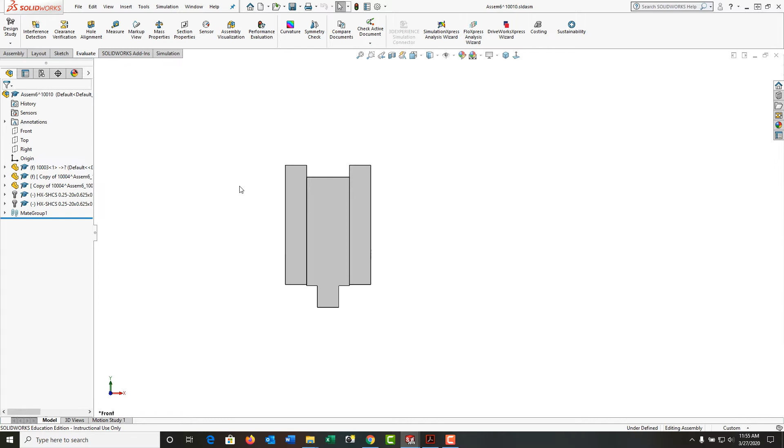The final subassembly I need to fix is my center jaw. Just like the other two, I'm going to select it and open it up. I'll look at it isometrically and I want to see how it behaves. Fortunately, it was the first part I brought in and everything is fine. I don't have anything to fix.

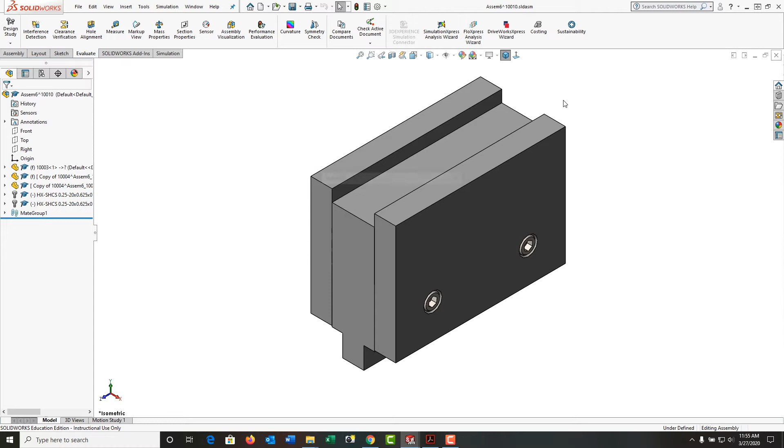If I did, I would go ahead and fix that, rebuild and save it. So I'll rebuild and save this as it's all fine, and then I'll close it. And just like my other two subassemblies, I want to give it a unique name. So I'm going to right click on it here in the feature tree, select rename assembly, and I'll call this one 10013.

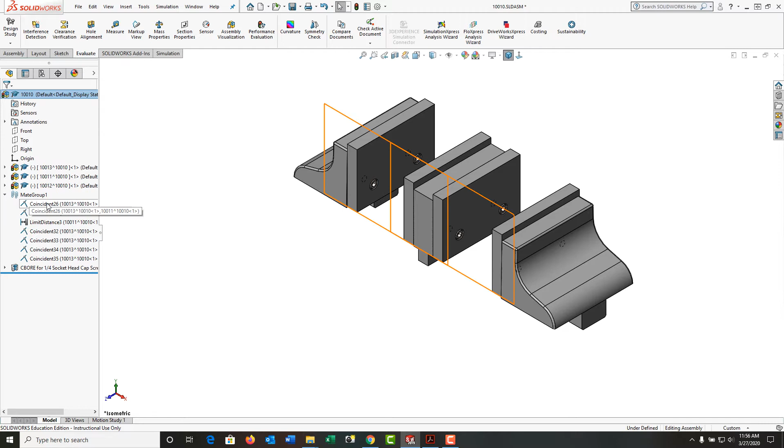And now I can fix the main assembly. When I look at the main assembly, this all moves around, and I want to see how it behaves. So the first thing I'll do is I'll right click here and I'll collapse my items, and then I'll expand the mate group. I had to delete some mates, so I still have the coincidence here. I have my limit distance here. I no longer have the symmetry mate. I'll have to go back and add it.

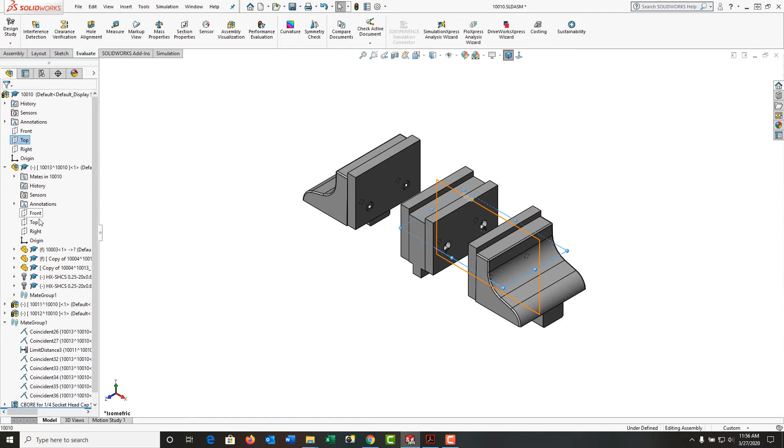But the first thing I want to do is this should be fixed. So I need to fix this part to the assembly. As I did before, several times, I'm going to just mate things. So I'm going to mate the front plane of this new subassembly. Hold Control, select the front plane of the main assembly, and make them coincident. I'll do the same with the top planes and with the right planes. So I've added coincident mate between all three.

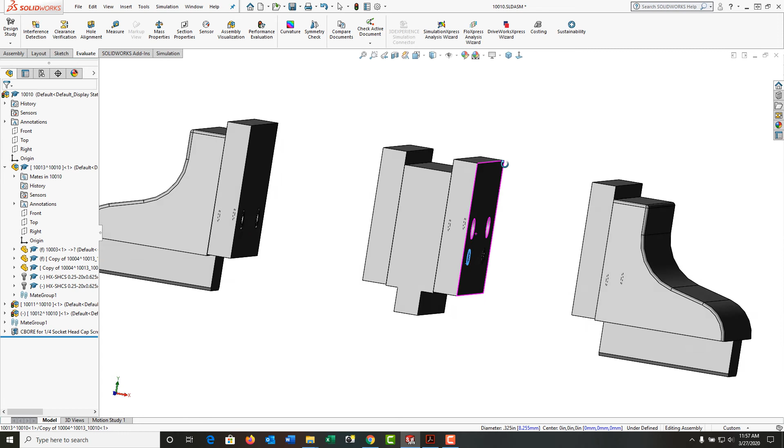I'm going to right click and collapse these, and now I can't move it, but I see an issue here with my screws. All right, we can clearly see something's happened to the screws. This is typical when we create a subassembly after the fact. There's often problems to correct. So the first thing I'll do is rebuild the assembly. And then these screws seem to fix themselves.

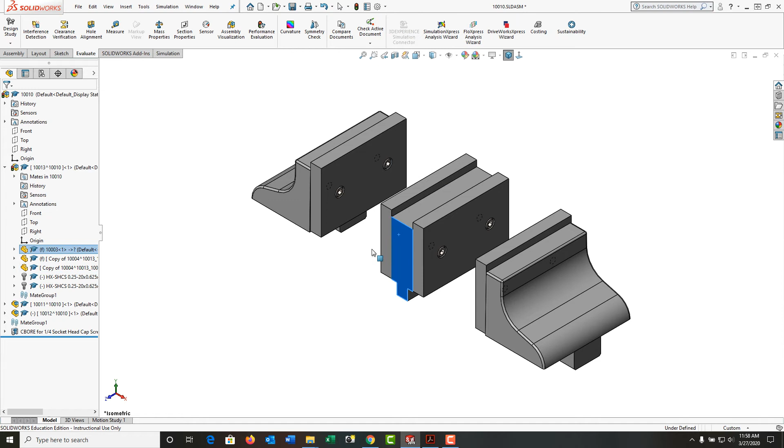I'm going to try moving components again. Everything seems fixed, but remember, this is rigid right now. So I'm going to select it and I'm going to make it flexible just in case I miss something. So again, I'm going to try and move this. I can't. These screws are fine.

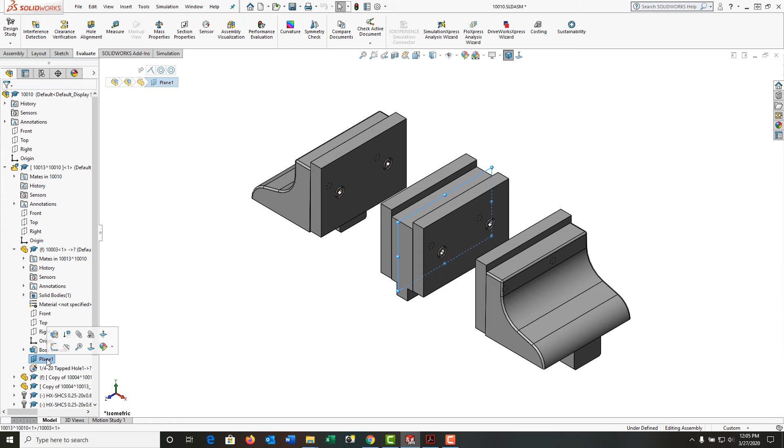The last thing I need to do to finish repairing this is to go back and add my symmetry mate. So I'm going to find the plane in the middle of this part. There's the plane I created for the symmetry mate. With it selected, go to the assembly ribbon, choose mate. Come down to advanced mates, select the symmetry mate as I did before, the plane's here, and I'll add the symmetry mate between this face and this face.

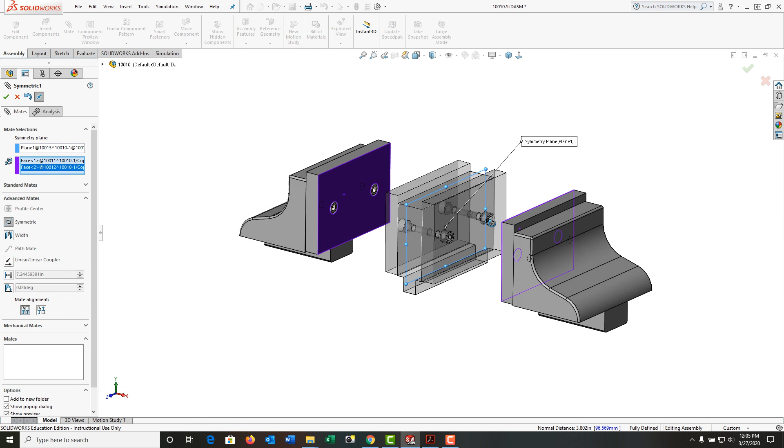I'll accept that, close my mate window, and I'll verify that it works. So my symmetry mate is working. The jaws are opening and closing as I'd hoped they would. I'm going to rebuild and save my assembly. And then in the next video, I can add the base for all the jaws.